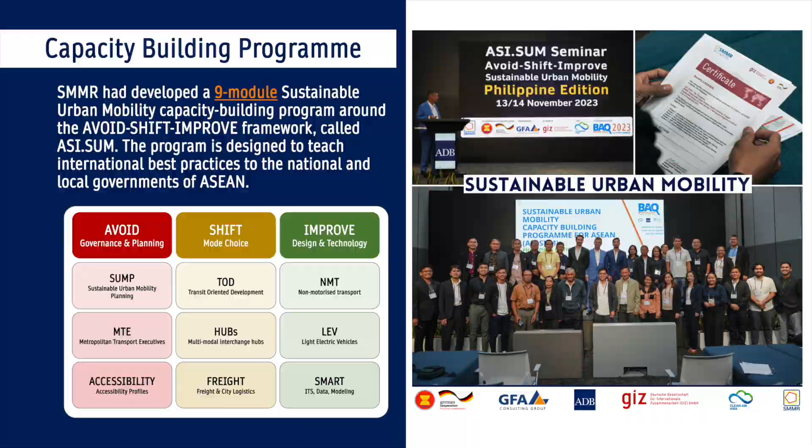And very briefly about me, I've had a very weird and wonderful 10 years of working all over the place, but the last 4 years really concentrated in Southeast Asia. A lot of my non-motorized transport experience comes from the Africa region, which is far less advanced than what I've seen in Southeast Asia. So I've had to start from the very beginnings and build up policy and infrastructure and strategies for different cities and countries. And I have to say here we're at a really good starting point. Not even starting point, you've already got a lot of good infrastructure, but we can really build on that.

This is us at BAQ. I did give an introduction to non-motorized transport. If it's a topic that you're not familiar with, we do have a video online. You're very welcome to watch that, because today I will sort of start where we left off. And for resources and reference material that I use, you may already know the Global Street Design Guide, an excellent resource, highly recommend it. ITDP also has some excellent resources that you can use. And today we go deeper. We talk more on implementation, evaluation, and again, the Global Designing Cities Initiative has really good resources.

So I will very quickly skim through what NMT is. When I say non-motorized transport, maybe we can also encompass micro-electric mobility, and the standard modes we generally include are walking, cycling, small wheel transport, and wheelchair travel. And we promote it for lots of good reasons, but especially because it's an attractive mode for very short distances. And non-motorized transport is really the foundation of a transport system.

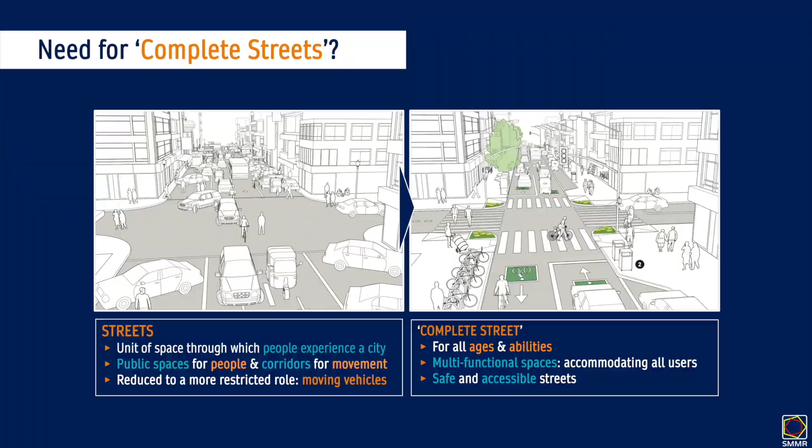However, in many cities in the ASEAN region, in the Philippines, our streets are not designed for all of these functions. And that's why we really want to promote this idea of creating more complete streets that cater to all ages and abilities, and we'll cover the age aspect later today. The objective is really to create safe and accessible spaces, but also very enjoyable spaces where we can spend our time and enjoy. And it sees our streets as multifunctional spaces, something you know very well.

I really like the night market here in Baguio, where you've created zones for the different movements, where you have your vehicular traffic, your commercial pedestrian traffic, who probably walk slightly slower than the pedestrian traffic on the outer lane. And then you've also transformed your space with pop-up shops, and you use the space in very creative, innovative ways. And the sheer volume of people can show that this has a lot of potential and it can be good for business.

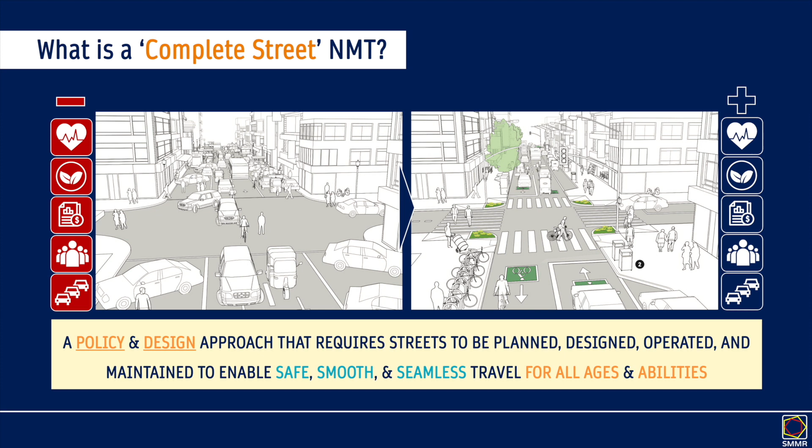And the reason why we want complete streets, you know this, much of our time is spent on streets. And our cities are increasingly our homes. I think the Philippines is roughly 50% urbanized, and that's only going to increase. So we might as well create enjoyable cities that we inhabit. They're essentially our habitats. If we do it in a way where we have complete streets, we have all of these benefits: reduced traffic accidents, better air and noise quality, reduced energy consumption, more equity, more public space, etc.

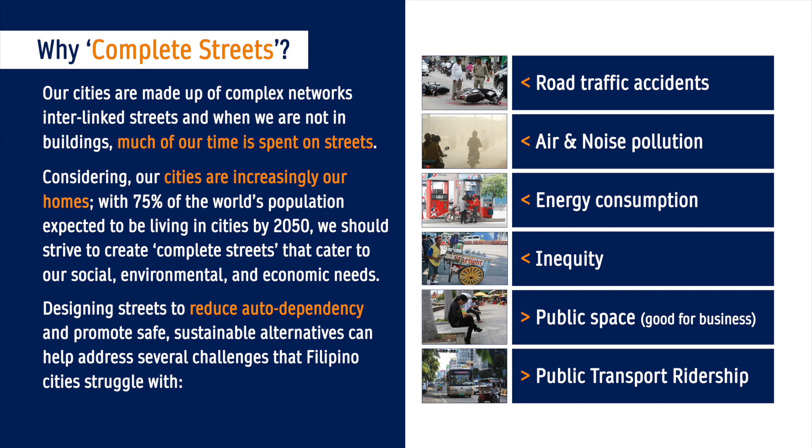And in Manila, we looked at street design elements that we can incorporate to create better streets. And we won't look at these today, but we looked at how we can slow down traffic with traffic calming. We looked at good footpath design, where we acknowledge the different zones and how we can maintain a consistent and continuous right-of-way for pedestrians, but also provide space for the street furniture, cycle lanes, and active frontages, so the space immediately in front of shops.

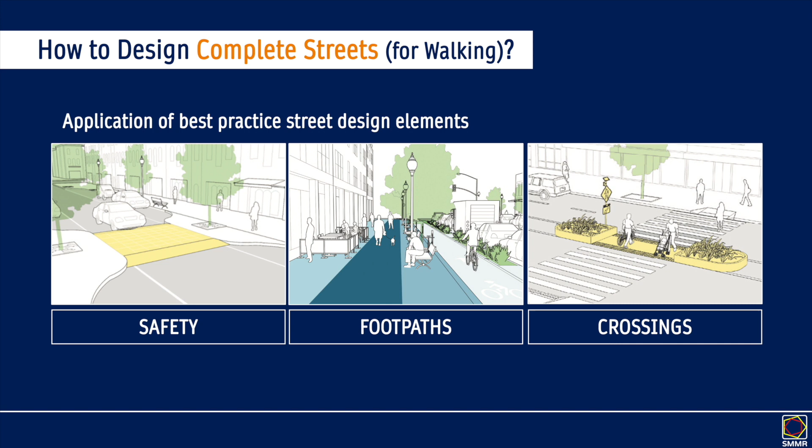And we also looked at crossings, the importance of creating protected crossings where you might have a refuge island, staggered crossings. We also looked at network design, how you can design a finer grained network to make accessibility and connectivity better in a city. And then accessibility and public space are two things we looked at. There's many other topics we could explore, and if there's anything here that's of interest in the future, we can deep dive into a different topic.

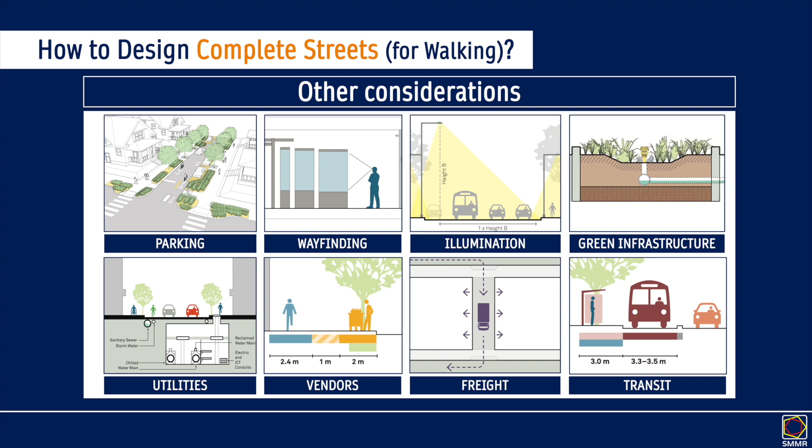The Baguio context. Here I went for a walk. This was on my second day, and I wanted to just capture what I could see. And I'll share a short video, and I did an appraisal. This is purely my user experience. It's not a very scientific method, and it's not very encompassing of the non-CBD areas, which I have since seen.

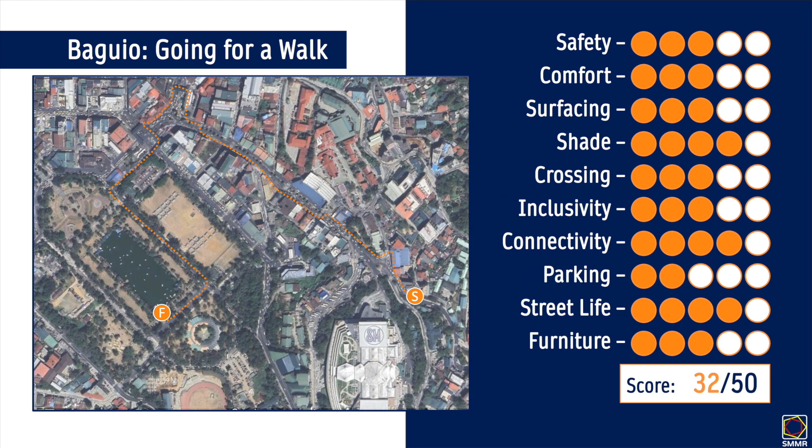And if I was to do an assessment, we did it in Ortigas, next to the Asian Development Bank building, and they got something like 24 points. So a big improvement. There's just a few areas where if they were fixed up, you could have a very nice environment. And I'm obviously trying to be quite critical. I did enjoy my walk, and overall, it was very good.

I also gave some thought to the strengths, the weaknesses, the opportunities and threats here, and the strengths I highlighted in the video. I then later in the week also saw other areas. I saw one of a few raised crossings, which made me very happy.

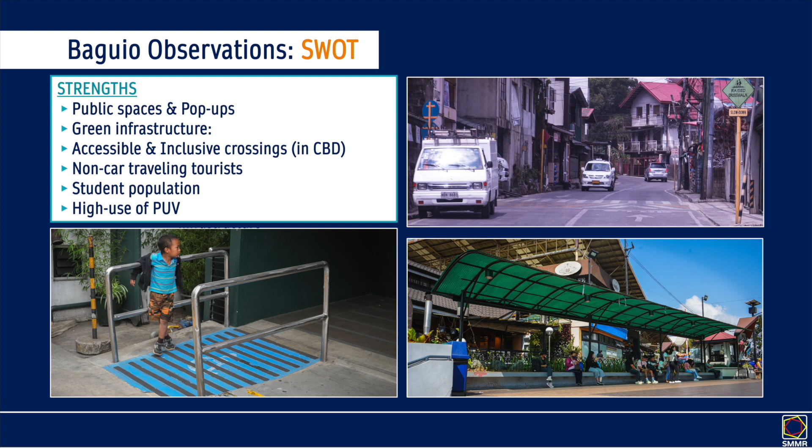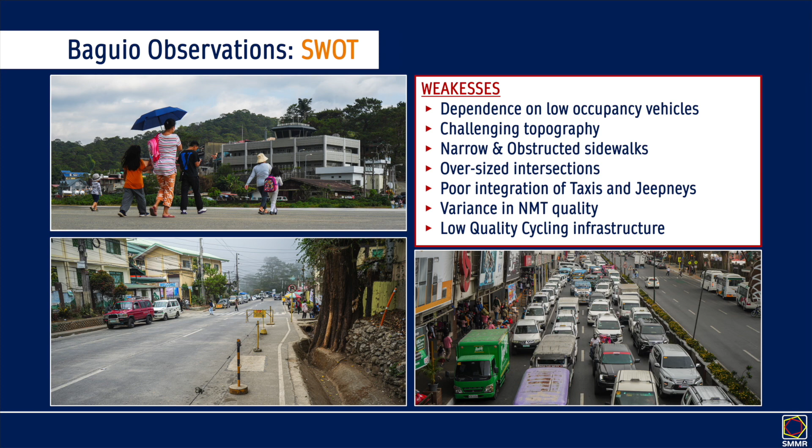And then a lot of opportunities to further calm traffic, to maybe do some traffic management, some traffic signal actuation. As I understand, the traffic lights in the city are not optimized or as optimized as they could be. That could be something to explore if we are to improve flow, especially in the context of closing a street

like Session Road. And other opportunities, again, this idea of cable car, I think that's a fantastic opportunity because you don't have much space. So if you can move people through the air in a vertical way, that could be a great way to, again, shift people out of cars and into an alternative.

And then threats. What I keep realizing is Baguio is a victim of its own success. You're doing great work, but the pace of growth and the pace at which more people are coming to the city is faster than you can absorb by building new infrastructure. And I suppose that's a great problem to have.

But if you didn't have this surge where you went from what was once 25,000 to almost 400,000, the infrastructure you have would be plentiful. And again, your problem is dealing with this in a context of growth. And so what we need to explore is a multi-dimensional strategy.

On behalf of the SMMR Project, we really promote the Sustainable Urban Mobility Planning methodology or approach, SUMP. You have your Growth Node Development Plan, which embraces a lot of these ideas. And you know this better than I do, but we need to avoid promoting more car-based mobility, shift towards more space-efficient mobility, which will include walking, ideally also some cycling, and mass transit.

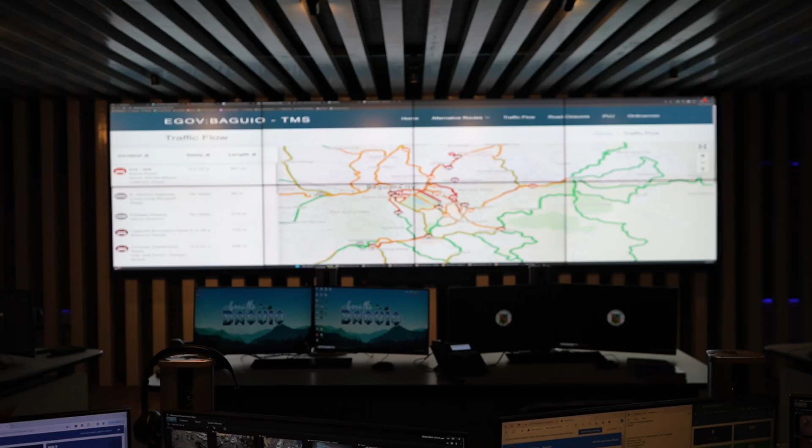And we need to improve the non-motorized transport environment. Also, we can make improvements to traffic management. And I visited the SC3, the Smart City Command and Control Center. Very impressive. You have very advanced monitoring capabilities. And I think in the future, you could also build in some control capabilities where you don't just monitor, but when you observe something, you adapt.

Say you provide information to vehicle drivers through variable message signs, or you update your traffic signals in such a way that improves flow. So a lot of great things are happening, but a lot more could be done. And today we're really here to talk about streets and how we can transform streets.

Street transformations. You may have done some of this in the past, but what we do with the SMMR Project is we use a tactical urbanism-based approach. So I'd like to cover some definitions, look at some types of tactical urbanism projects with some case studies and how we can phase them.

If this is a new concept, tactical urbanism is where you temporarily transform a space in hope to eventually make it permanent, because permanent change is often complicated, politicized, controversial. So when you change your streets, people don't like change, so you should do it gently and incrementally, and tactical urbanism allows us to do this. And often you would use things like cones and chalk just to test new ideas.

You would use, at a later stage, maybe some paint and some street furniture to improve the space. Also, you could set up plants and pots to serve as barriers to guide traffic. And you can also get creative and create new public spaces in these areas with street art installations. And the idea is to involve local communities as best as possible.

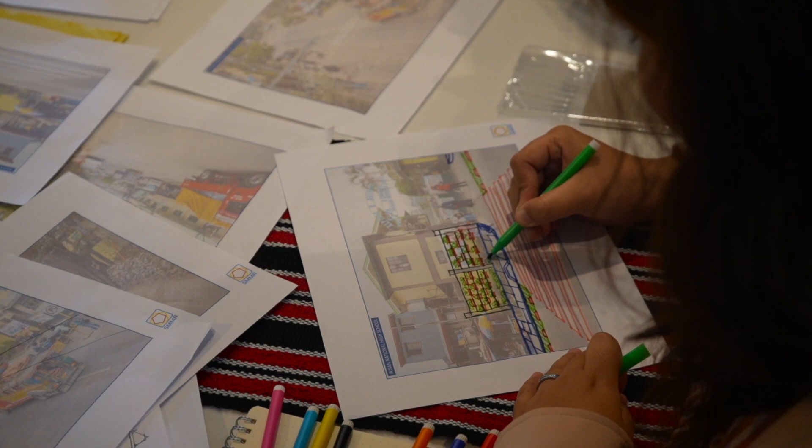We bring in as many stakeholders, and this is what we're doing here. And we hope to involve you in the future. And we want to get everyone's thoughts and feedback and have their DNA reflected in the project. Because if we create something that's desirable for the greatest number of people, there's a higher chance it will be successful. And here's an example. This is the street before, this is it afterwards.

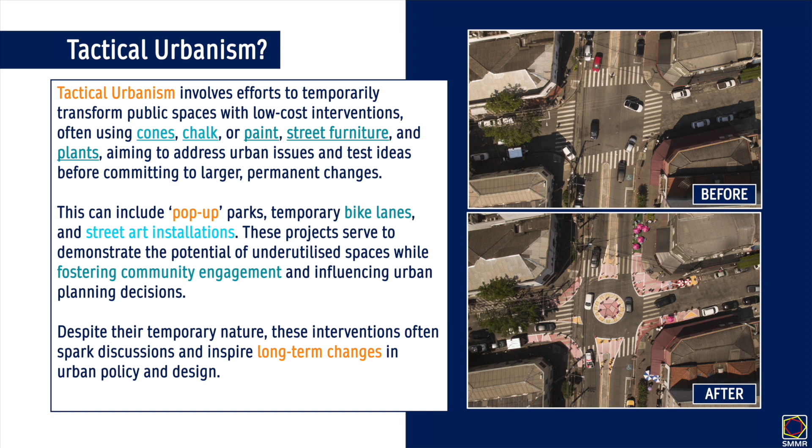And we can look at a few more examples and just generally how we can go about introducing these concepts and phasing them. You would start with a pop-up, and this is from a piece of work I was doing in Ethiopia. So the pop-up is something you do just for a couple hours, maybe a couple days, very low cost. Here we did it just using paint and cones.

And if the local community doesn't like it, if we receive a lot of resistance, the rain will wash it away and we just remove the cones. No problem. If all goes well, and sometimes you need to iterate a little bit, move the cones, move the strings, move whatever you have set up to find a configuration that works for you.

Then you can move to an interim stage, which is a project that would probably last several weeks or months, sometimes even years. You could say that Session Road, the pedestrianization efforts, is sort of an interim step, hopefully, if one day it does become fully pedestrianized, and that generally involves slightly higher costs.

You will use more sophisticated materials. And if that goes well and you're able to source the financing you need and get all the approvals and all the public consensus, you can move to creating a more capital-intensive project, which would be a civil works-based project.

And you can sort of see the workflow we went through in Ethiopia. And now many city streets have been inspired by what was once just a pop-up. A bit of paint, some cones, has now resulted in many urban streets being upgraded to a much higher standard. And it's just a really great way for us to trial ideas and demonstrate to the public what their space could be like.

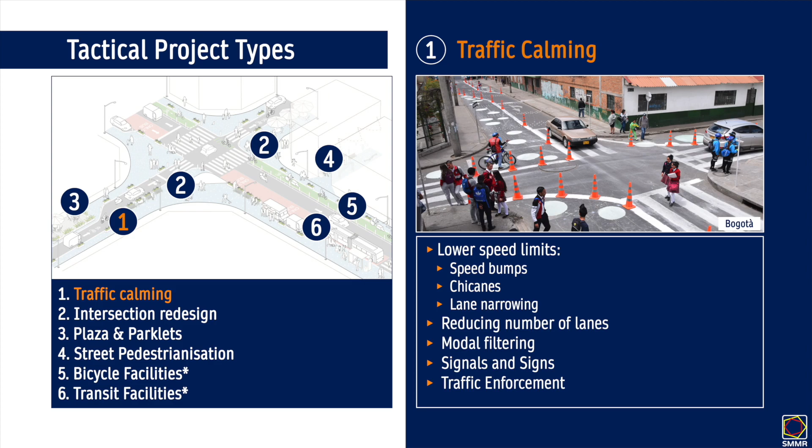And there's a lot of different types of tactical projects we can explore. A good start is with traffic calming, especially around, say, school zones, which is what we're currently exploring, where you could calm traffic using speed bumps, chicanes, so lane shifts, forcing vehicles to not be able to drive in a straight line by narrowing your lanes. Narrow lanes means slower traffic.

You could do some modal filtering, so prevent certain types of vehicles from entering the space. Maybe heavy goods vehicles shouldn't be in some of these streets, so you could remove them, or you could do something as simple as some traffic enforcement, essentially to slow vehicles down to increase safety.

This example I shared earlier is in Sao Paulo in Brazil, and here they introduced a roundabout. You can also see they made the cornering radii more tight, so a vehicle can't corner as fast, it has to slow down. That will increase safety.

Also, the vehicles weren't turning in the intersection in a very safe way. They were occupying more space than they needed. And so a roundabout can be good for guiding people in a more guided way, so you can anticipate the vehicle movement better, which is nice for pedestrians.

You also see the median has also been turned into a refuge island, and the curb has also been extended in some areas. And if you extend your curb, you reduce the crossing distance, and it creates a much more pleasant space for pedestrians. This began as a pop-up, and in one year, the treatments that they experimented with were made permanent.

And there's a lot of data collection that goes into this. You have to survey people before and after. This is both citizen surveys or citizen dialogues where you ask local residents, shop owners, drivers, their thoughts. And of course, you can also do more technical surveys where you do traffic counts of vehicles, of pedestrians.

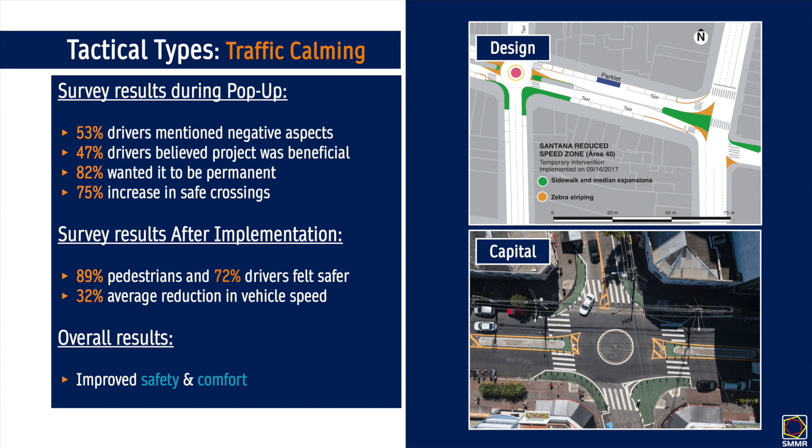More consultations were done just to explore how the space could be improved. And after the full implementation, the data they got during the surveys was more positive. It took people a bit of time to get used to the change. And again, this is why this is a great approach, because it gently introduces these ideas and helps you manage the politicization of some of these activities.

This is another traffic calming project. We saw the image earlier in Colombia, where you can see there's wider sidewalks. They've reduced the corner radius or radii. They've reduced the crossing distance. Vehicles here, if you see number 5, can no longer drive in a straight line, so they're forced to slow down on the approach to the intersection. And all of this is very simple, very low cost, but has quite an impact on the local area.

And here also data was collected. 93% felt safer. There was a 26% decrease in average vehicle speeds. 27% of people were using the curb extensions, and there was a 22% increase in people using the crossings.

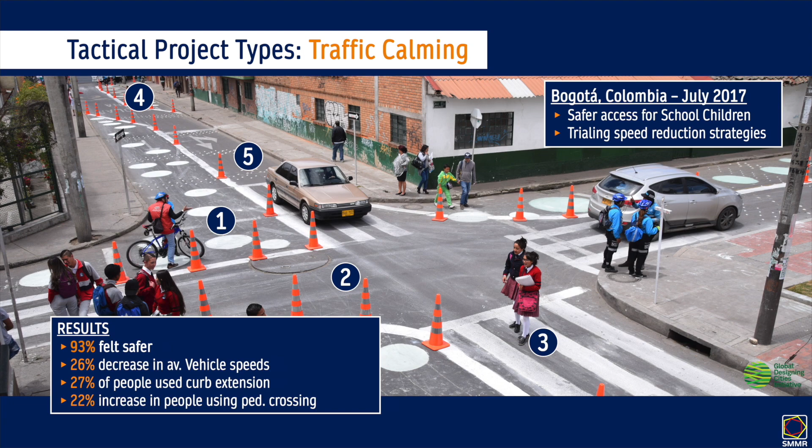So, small measures with, I think, some valuable changes. Then we can look at intersection redesign.

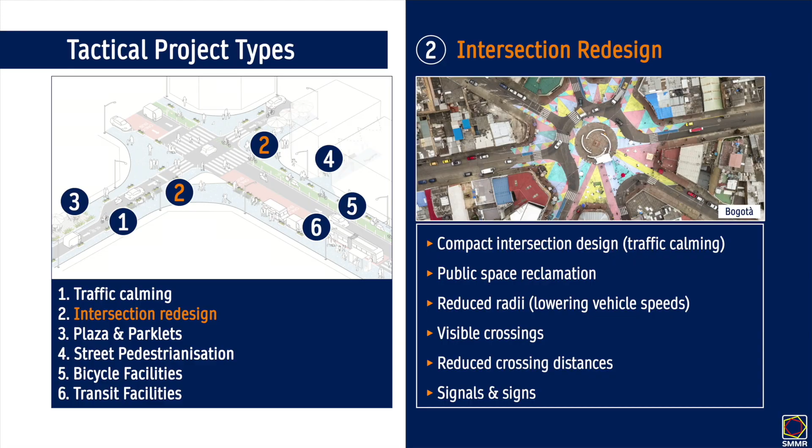I know the past two examples were also intersections, but the idea there was really to calm traffic. You can do much bigger projects around intersections. I've seen some very oversized intersections in Baguio, and from observation feel like some of that space could probably be reclaimed in a way where pedestrians will really benefit, but vehicles will probably also benefit. These look like quite stressful spaces to drive into, where there's a lot of potential for conflict. If we could rationalize that through design, it could be a win-win for everybody.

This is a project I'm working on in Cambodia, inspired by Colombia. Whenever doing these projects, I recommend searching online for other cities doing similar styles of implementations—there's a lot you can learn from them. That's essentially what we've been doing in Cambodia.

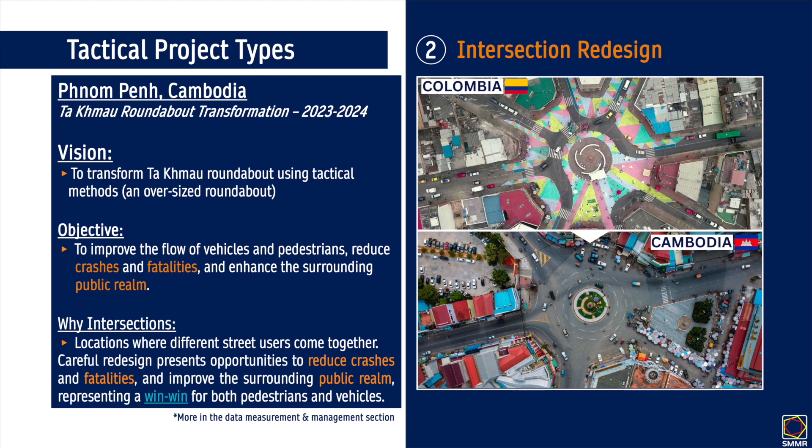We wanted to transform this roundabout, and I'll go into more depth later on this case study. But essentially you have a big monument in the middle here—it's a Buddhist monument in a Buddhist country. Every day in the evening, people start crossing this very dangerous roundabout to go pray, and it's kind of a shame that they have to go through that to then do their prayers.

You can also see there's a lot of tricycles just clustering into the street. The parking here is just haphazard, and it's a very unoptimized way of using the space. There's a lack of pedestrian crossings, and there's just a lot of room for improvement. So we are currently exploring how we can improve this space. It hasn't been implemented yet, but we're now at a later consultation phase and gearing up for our implementation. I'll cover some of the data elements that we collected to try to make this a reality.

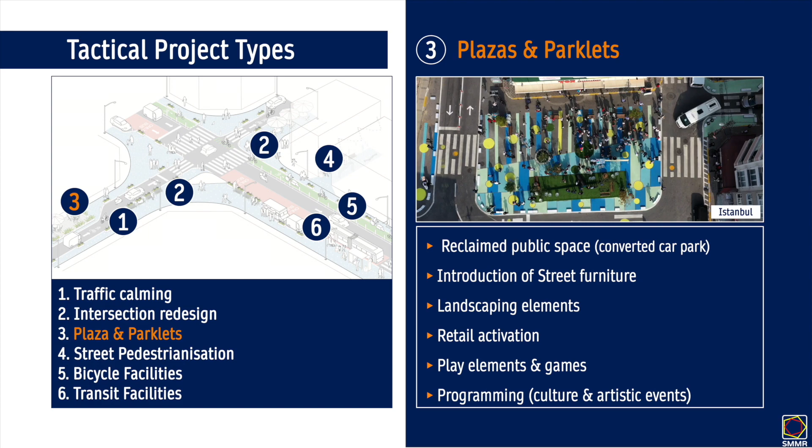Other ideas are plazas and parklets, where you find an underutilized space. This is a car park in Istanbul where you can introduce features, street furniture, landscaping elements, just to reactivate the space. If you create a more pleasant space, the surrounding businesses are probably going to benefit. If you have a coffee shop here, he will definitely see more customers, and you sort of revitalize areas in the city. Another exercise we could do is maybe pinpoint potential locations for projects like that.

These types of projects do work. My city, Dublin, pedestrianized the main street in the city centre. It became the main street because it was pedestrianized, and it now has the highest land values in all of the city. Similar story in Copenhagen.

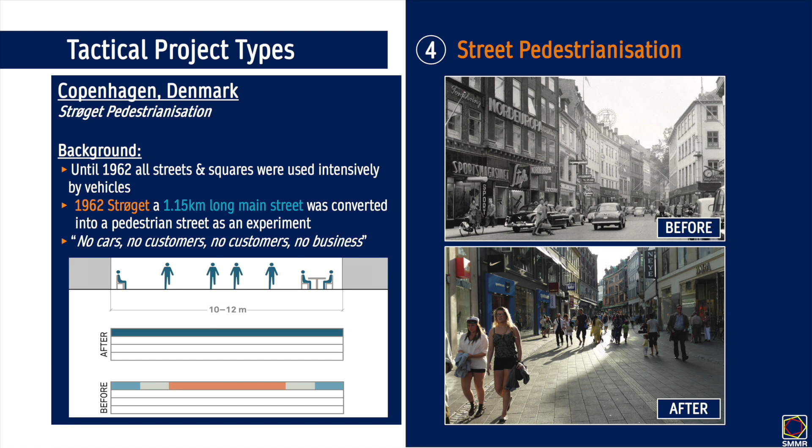Back in 1962, this was a very car-dominated street, and they pedestrianized it. It was not popular at first—people thought no cars means no customers, which means no business. But I can find you dozens of case studies where the exact opposite has happened.

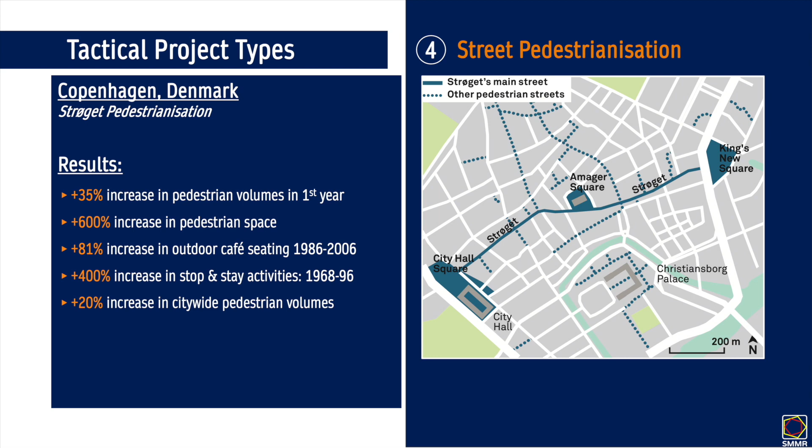And in the Filipino context, you have formalized tax-based systems, so if there's more customers, there's more tax revenue—there's really a strong incentive to do projects like this. Here, quite similar, 1.15 kilometers of commercial streetway were pedestrianized, and over time they added new areas. I think Session Road could also be similar. There are some areas off of Session Road that could be turned into public spaces, and then every day will feel like Sunday, which as I saw was really fun.

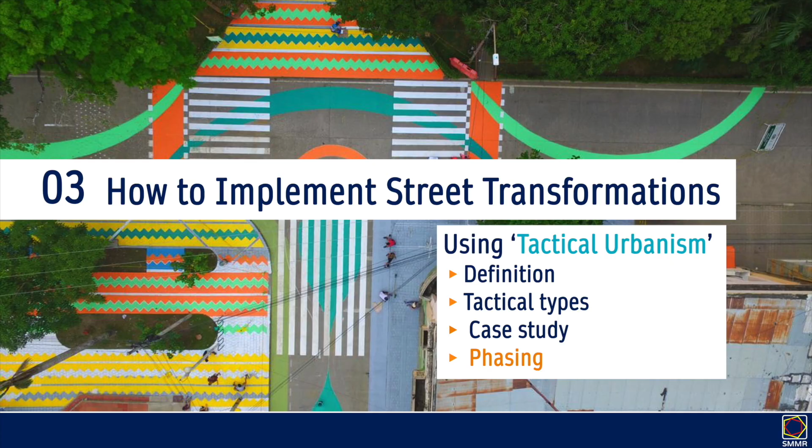Then when you do a street transformation, if we zoom out a bit and talk about the phasing of the different project types—you've already done a lot of work, but if I was going to a city who hadn't done anything, I would recommend starting with the least disruptive types of projects. They're the easiest to get over the line, and you should always be trying to maximize public approval, at least in the early stages.

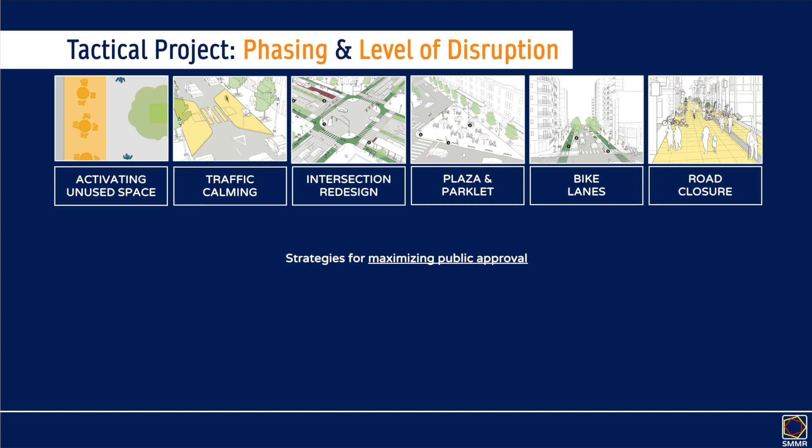So say activating an unused space that has a low impact on traffic, so the level of disruption is quite low. Traffic calming, again, you might slow traffic, that's the intention, so drivers won't be happy, but overall I think they can see the benefits, and there are ways you can also benefit the drivers.

And then as you move across the spectrum, a road closure has a very high impact on traffic, so it's very disruptive. So if you want to do this, your citizens, your local population needs to really understand the benefits, and not just understand, but have experienced the benefits of public space. And that's why it's generally good to move through the different project types before you do something very ambitious.

But some cities have gone straight to road closures and the results have been good. But obviously, start small and work your way up. And that's what we have in mind for our project.

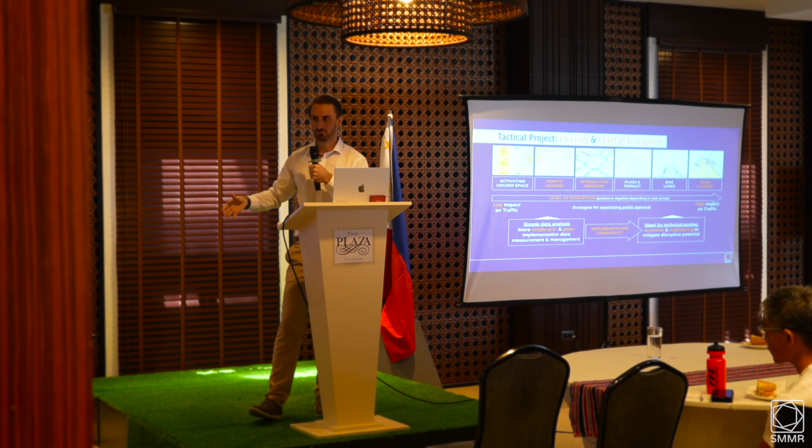It's also, from the project development perspective, a lot easier if you start small. The data you need is more simple and basic. So you may not even need to do traffic counts. If you just have a small project where you lay out cones, you can just use your observations and intuition, see what works, what doesn't work, probably spend time observing what happens during the peak hours.

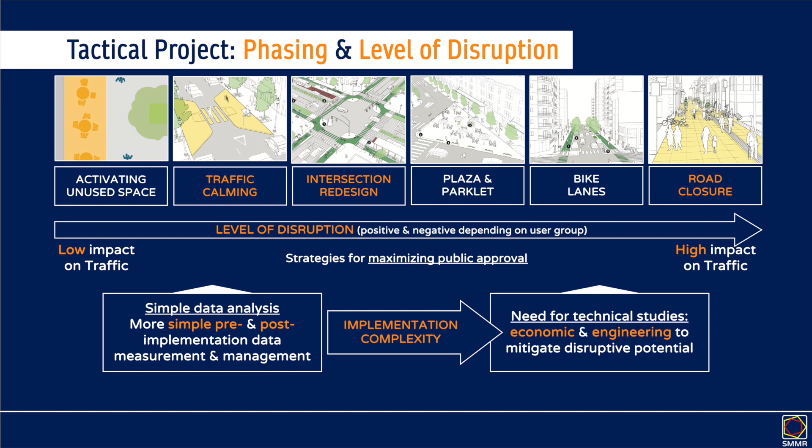And that can be done in a very short time span. As you go to more complex projects, you need to collect more data, traffic counts for vehicles, pedestrians, get a lot more opinions, and as you go to a full road closure, that gets a lot more complicated.

In the case of Session Road, you probably need to do a comprehensive economic study, a cost-benefit analysis, or even more, a multi-criteria analysis to really understand the impact, and a probably quite complex traffic impact assessment where you use sophisticated engineering tools. You don't need to.

You could just do it and the impact would be felt by the vehicle drivers. But if you could anticipate the impact and produce a lot of good communication collateral to communicate to the public - this is the impact this will have, this is how we intend to mitigate it, here is the proof, here is our data, here is our simulation - then you can make these projects a reality.

But of course, that requires a lot more technical studies, which requires more resources, be it cost or human resources. And so our recommendation is really start small and work your way up.

Try to also focus on the most vulnerable groups. So we are thinking a lot about children. They are one of the vulnerable groups, especially young children that are, say, less than a meter tall, and elderly, and also disability groups. Because if you start with them, the likelihood of opposition is lesser.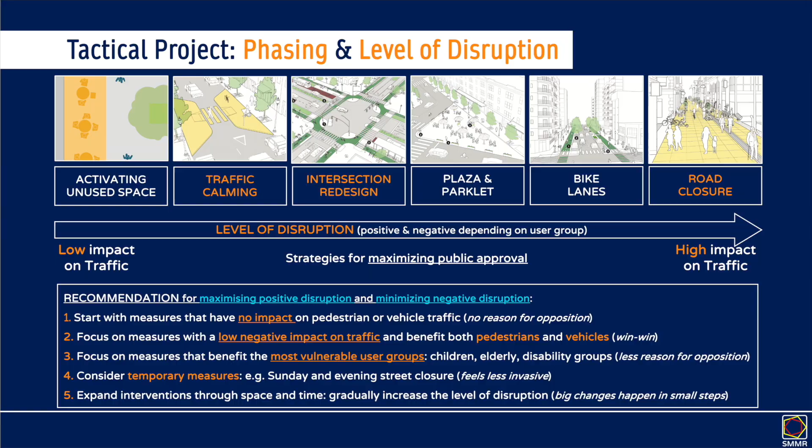And so we're applying this to the idea we have for a project in the school zone. And also start small or start temporary. Session Road is a big impact or high impact activity, but it's done in a temporal way where it's only on Sundays. So that's also a way you can test big ideas and manage the backlash by saying, okay, it's just Sunday, we're just trying it.

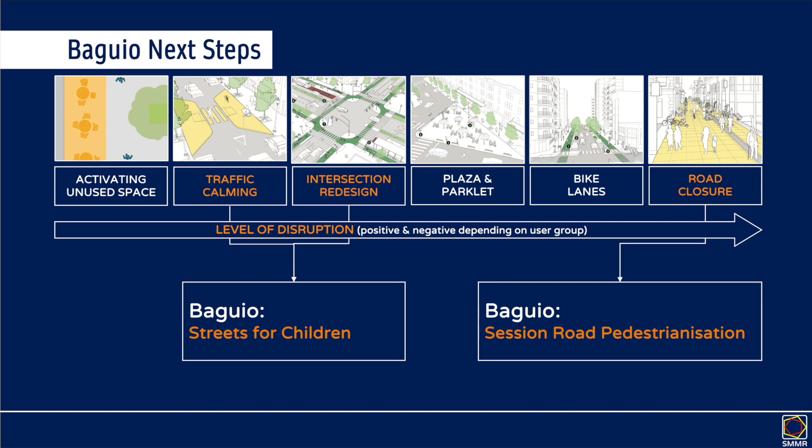This brings us closer to the idea for school zones. So we really want to start with streets for children, a vulnerable group, and the idea we have is really centered around, in part, activating some unused space that we observed, calming the traffic, and there's no intersection at the school we're looking at, but I'm sure some of the schools in Baguio are around intersections and there could be room to tactically improve them.

So going a bit deeper on the topic of children, obviously our streets have a big impact on our development, and we'll look at that more in the afternoon. But the streets you have and use to get to school will influence your health, your physical and cognitive development, and your social well-being. And these types of projects are also really good for bringing people together.

Yesterday, essentially with a few emails and then a meeting on Wednesday with the school, Irisan National High School, we discussed a few ideas very quickly. We spun that off into a whole training workshop yesterday where we had students, teachers, parents, grandparents, and all of that happened so fast because people were just broadly interested in, these are my kids, my grandchildren.

I do have an interest in seeing their experience getting to school improved, and in a matter of 48 hours we gathered very valuable insights on what we can do. What we are proposing also builds on the activities already being explored as part of this Streets for Children program. Now I was hoping to deep dive into the tactical urbanism workflow, go into how we can make it happen. There are multiple steps.

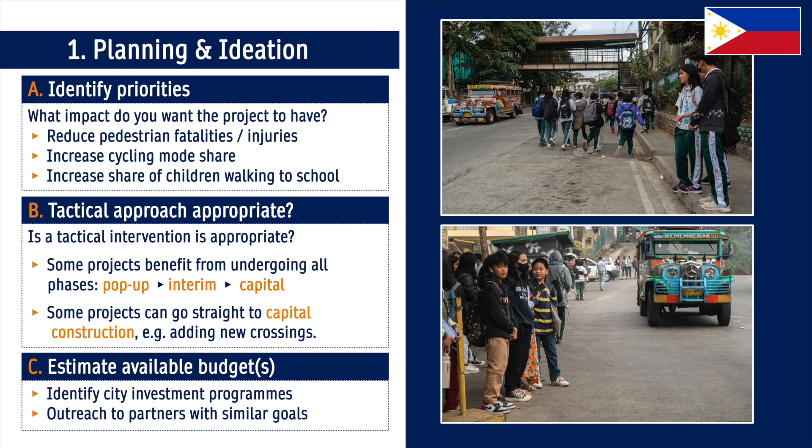Early on it is good to estimate or see what kind of budget you have available, because you will be sharing with stakeholders who will be affected, and they will be curious to know to what extent can you change and upgrade this space. Some of these questions you don't always have the ability to answer early on; sometimes you need to gain a bit of momentum before they come to light. So that's really what you would do in the planning and ideation phase.

In the Cambodian project I'm working on, our priority was road safety. This is an accident hotspot. We also wanted to improve pedestrian movement throughout this space, and here tactical urbanism was a good approach.

In Cambodia, there's still very little understanding and regard for non-motorized transport. So even raising the idea of street pedestrianization is so unthinkable that we decided, let's frame our project around improving traffic flow. Through the improvement of traffic flow, we can also benefit the pedestrians. When we framed it like that, we could get more consensus around this idea.

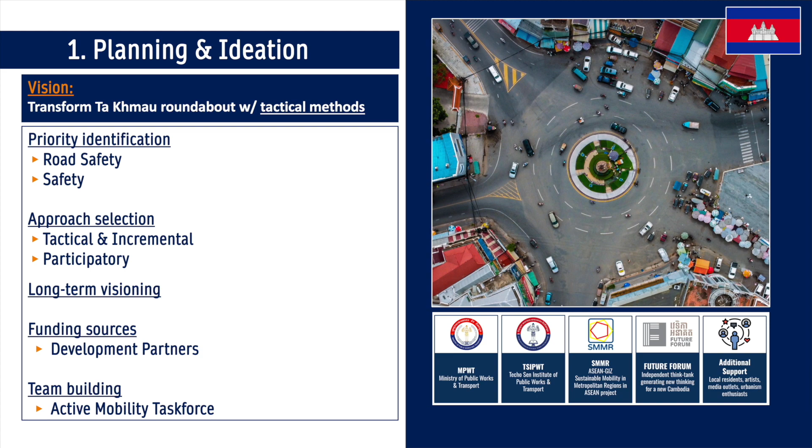We also have a long-term vision where we've identified lots of different intersections where what we do here could then be scaled and replicated. To do this, we also put together a team: the Active Mobility Task Force, which includes the Ministry of Public Works and Transport, the University, the SMMR Project, a local think tank, and we've also received a lot of support from local communities and residents of the area.

We also did some desktop research and saw this project in Colombia and thought, okay, this seems like a good kind of project to emulate or at least learn from.

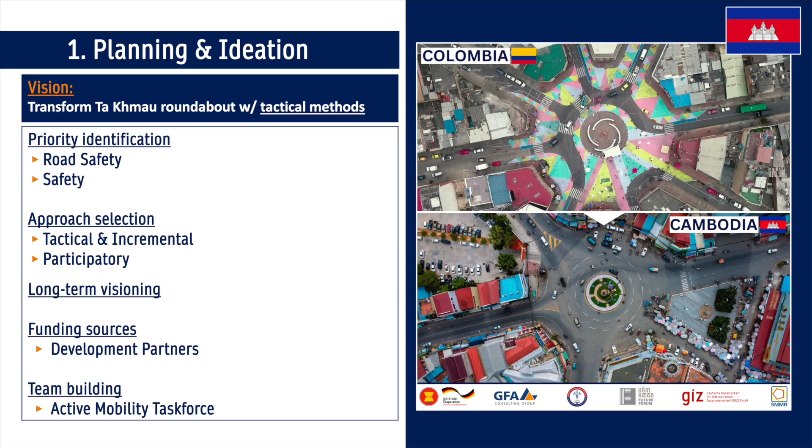In this phase you also select your location. We looked at lots of different options and chose to focus on an intersection because these are areas where you can have quite a big impact. They're very conflict-prone areas. In the case of Phnom Penh, the city where I live, a lot of the intersections are way oversized - there's so much space that could be reclaimed.

If you ask anyone here, say this is Ta Khmau, ask them about Ta Khmau, whether they know anything about non-motorized transport or not, they will shake their head and say, oh that's a terrible place. It's always terrifying when I show up on my motorbike and have to cross this space, and everything is overlapping in a way I've never even seen in the Philippines. We have a very high share of motorcycles and it's very stressful.

So when we ask them about certain spaces, the people already know, and you can sense that this is something they would like to see happen. After we selected our location, we chose this one - it's called Ta Khmau.

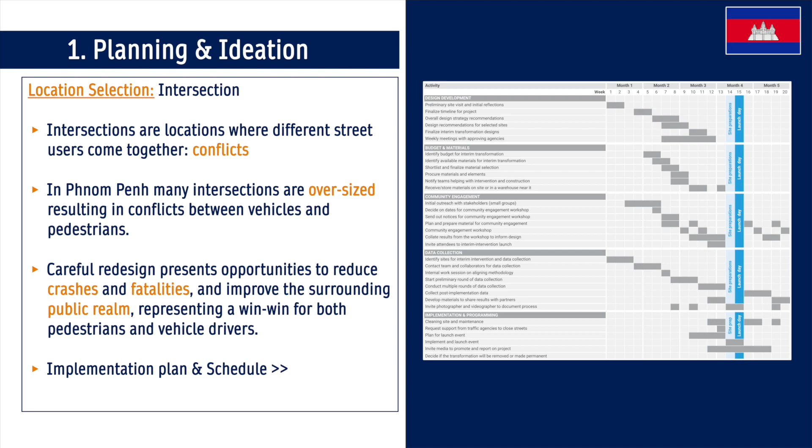We then prepared a detailed plan, and once we had that, we could really begin. This step involves appraising the existing condition, and we began doing that over the last two days around Irisan. We did some site visits and gathered a lot of visual documentation.

We have lots of photographs, lots of videos, and we're starting to understand how this space works. It's a really interesting space where you have back-to-back-to-back jeepneys, especially at 3 p.m. when the elementary school closes, which is here. And then at 4 p.m. it continues when the high school closes. You have a lot of crossing right between the two school gates.

You have some tactical urbanism already, you could say, to protect especially the elementary school kids walking up and down here, but you also have an open drain here, which is an opportunity area. If you could cover that, you could reclaim a lot of space.

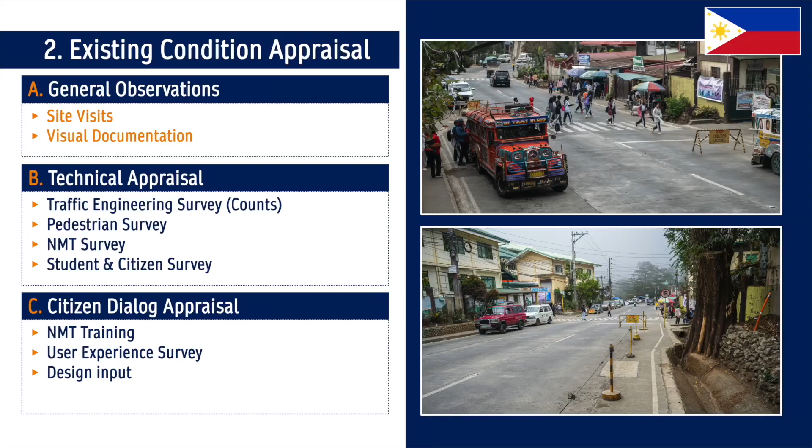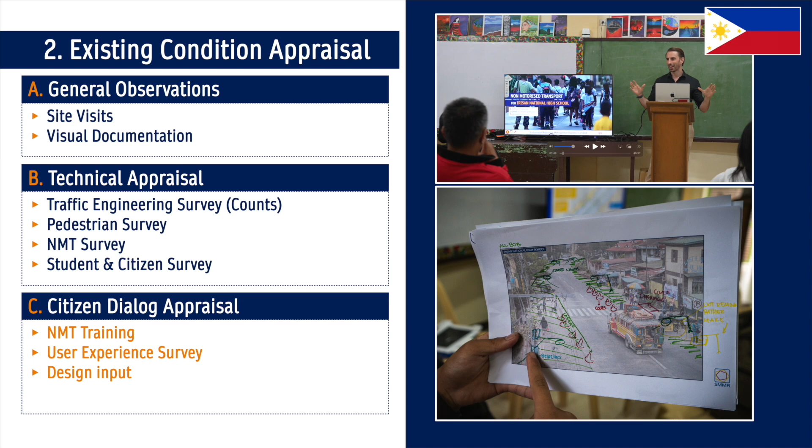So then you can also do some trainings. Yesterday we gave a talk to the 12th grade students introducing the topic of urbanism. We had to take a step back and acknowledge that maybe they've never even thought about how space can be transformed, and that our streets are the outcome of conscious decision making, and that they can have a say or some agency in how our streets are shaped.

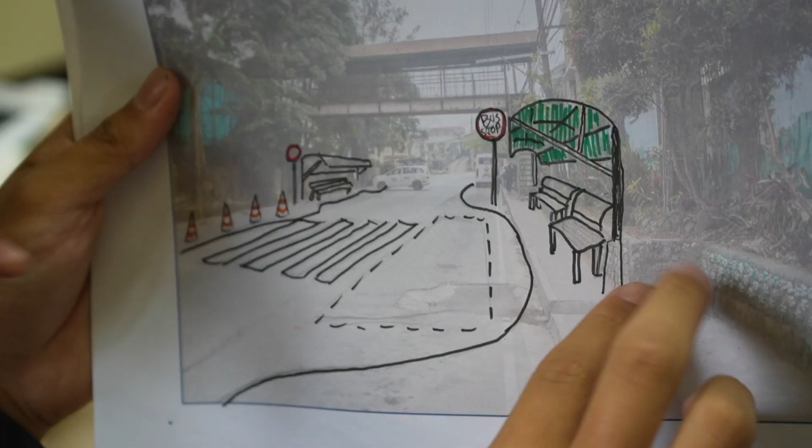And we gave them a survey. We wanted to understand their subjective user experience going to and from school. We asked them lots of different questions on safety, on whether or not they feel there's enough, say, street furniture around the school. A big list of questions, I think 20 questions in total. And then we also asked them to sketch ideas over photographs. We got lots of very beautiful insights, lots of great ideas, some very implementable and easy to introduce ideas.

What we would now need to do as one of the next steps is a technical appraisal. So start doing surveys. There's many different types of surveys we could and should do. And what we've done in Cambodia, again, also did site visits, wanted to understand how the space works. And from that, we developed a survey. And it's not one survey, it's multiple surveys. We want to collect quantitative data, also qualitative data.

So for the traffic engineering survey, we had to do traffic counts. We wanted to understand over a 12-hour period the traffic volumes. We didn't even know when the peak hour was, so we had to really collect in 15-minute intervals counts throughout the day, and also categorize the vehicle types to understand just the general mode share.

We also did a pedestrian survey where we did pedestrian counts, which is similar to traffic counts, but slightly different methodology. We then did an NMT survey, and I'll share some of the results, where we essentially studied the environment, measured the footpaths, counted the obstructions, counted the street furniture, and you'll see the maps we produced with that data.

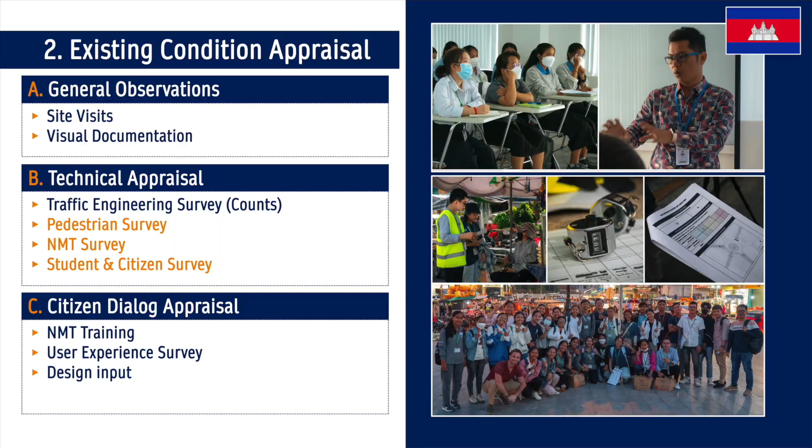We know that there is a camera that does have analytic capabilities on the overpass at the school, so we could get this data quite easily, which is a very good starting point.

And the surveys looked a bit like this. So traffic survey, that's the counts. Pedestrian survey also counts. The NMT survey, I'll show you the results. And the citizen survey, obviously you need to understand what the locals of this area think of the proposition of improving the space. So we surveyed 52 commuters, people driving through the space, we stopped them, we asked them questions. We also interviewed shop owners and street vendors just to gauge what they thought.

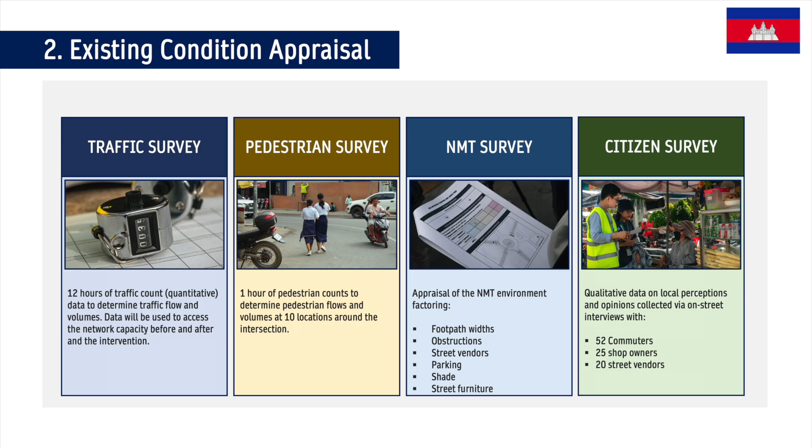For the NMT survey, we looked at variables like this. We went around and we measured the existing footpaths against best practice. So if your footpath is more than 260 centimeters, I don't know it in feet, but that's generally a very wide footpath. And this is the results we got.

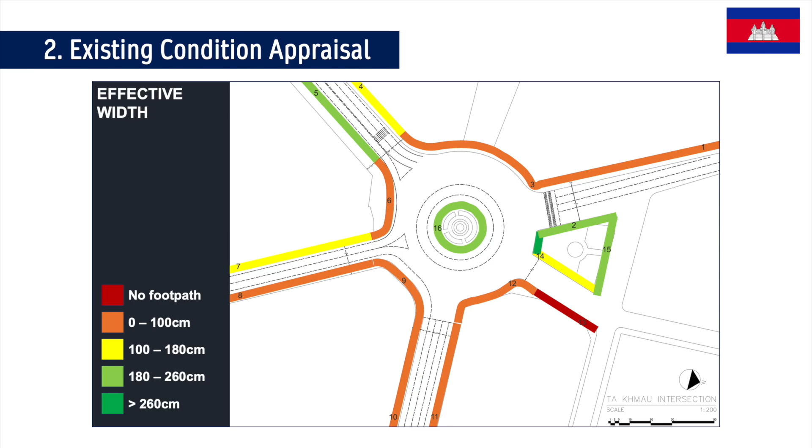And if you compare the width versus the width you can actually use, it's not a very good picture here. Suddenly you have your wide footpaths, but you can't actually use them. And most of them are too narrow to even move across with a wheelchair. So it's useful to know that. And when you know that, you need to understand why the effective width is reduced so much. And generally it's because of obstructions.

There's lots of different types of obstructions. There could be street vendors. There could be construction rubble. There could be parked vehicles. And there could be more like utility boxes that aren't well integrated into the streetscape.

So we went around and we counted each of the obstructions, but we categorized them on whether or not they were permanent or temporary. So if you have lots of temporary obstructions, like a street vendor, they are easy to rearrange in the space. If you have permanent obstructions, like an electricity utility box, that's much more complicated.

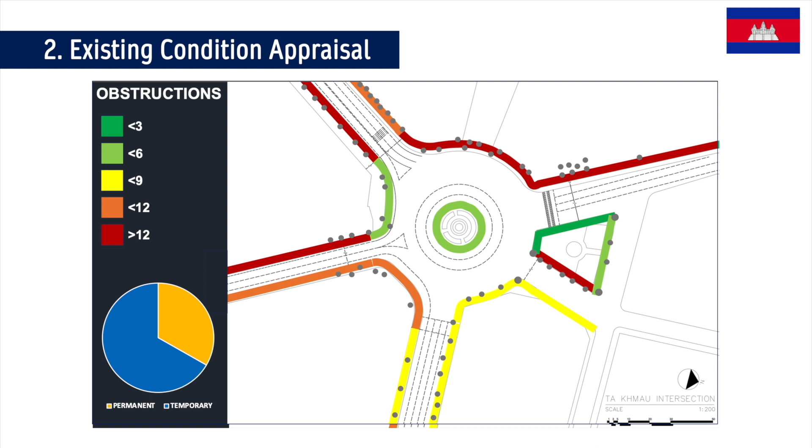But generally, you'll find, at least in the Southeast Asian context, that most of the obstructions are temporary, and through a bit of design enforcement and later down the line policy, you can manage these, and suddenly you can free up a lot of your space, win back some of your effective width. We also looked at the surfacing, so how smooth the footpath was, and if there was a footpath.

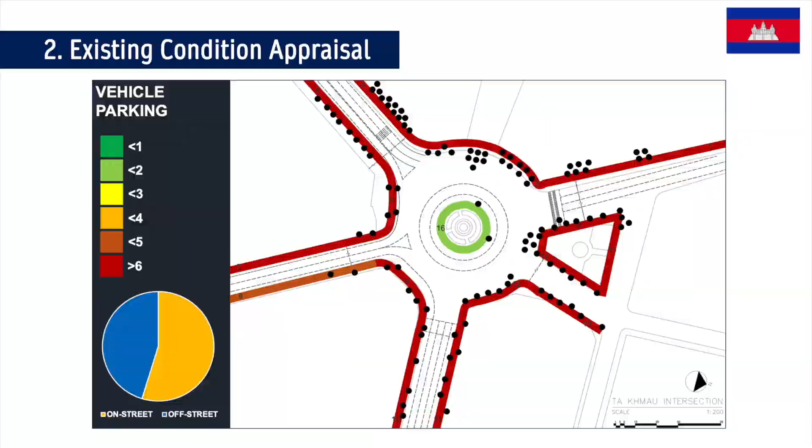We also looked at where vehicles are parked, and there's no parking strategy in this space, but there's a lot of parked vehicles. So parking needs to be understood. So we have to count how many vehicles are parking, where they're parking, understand why they're parking there, and see if there's a way we can reorganize the space. And fortunately, Cambodia, again, is very two-wheeler based. So they're relatively space efficient, and parking strategies can be easier to introduce.

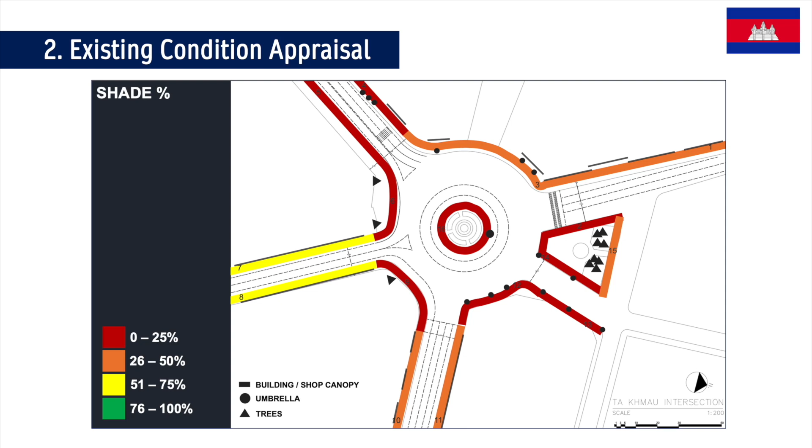We also looked at shade, and here we should look at shade and shelter, given that it rains. And again, if you want to encourage walking, you need to create the most comfortable environment possible. And if you can provide shade with shelters or green infrastructure, it's worthwhile surveying that. And yesterday, if we look at the sketches of the 12th graders, we can see a lot of them were drawing sheltered areas so they could be out of the sun and out of the rain.

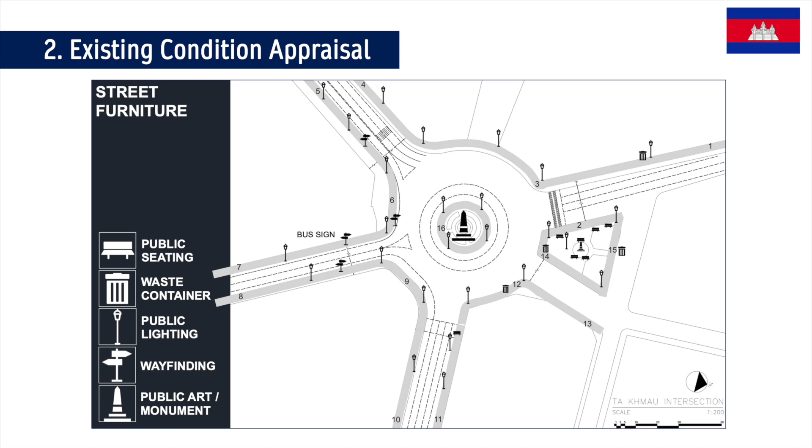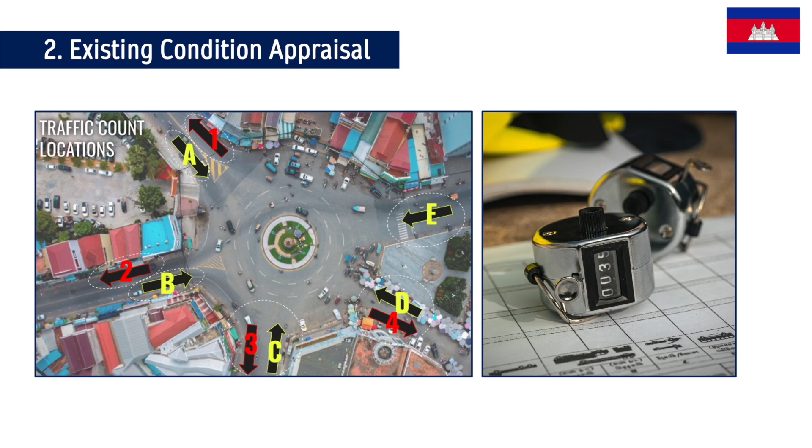You can also look and map out all the different street furniture, and we saw a lot. Same could be done for the traffic counts, where I have a great architecture team working on this project. We don't have a great GIS team, so those maps were made in PowerPoint. But it works. It's enough to essentially communicate what we're trying to do. But it's not the most scientific way, I must admit. If I have the time, I will eventually get around to it myself.

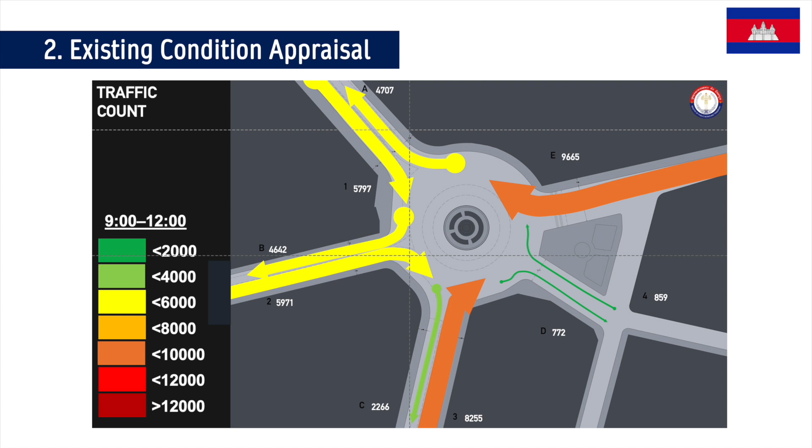But we made even our traffic count maps in PowerPoint, and you can sort of see the volumes. And we did this for a 12-hour period, mapped it all out. And ideally, we do this in a GIS tool, and we can see in 15-minute, or we can aggregate in hour intervals and understand the flow of vehicles. So then we can understand, if we remove this space, what will be the level of service of the road. And for that, I don't have the outputs to show yet, but we are developing a micro simulation from the data we collected.

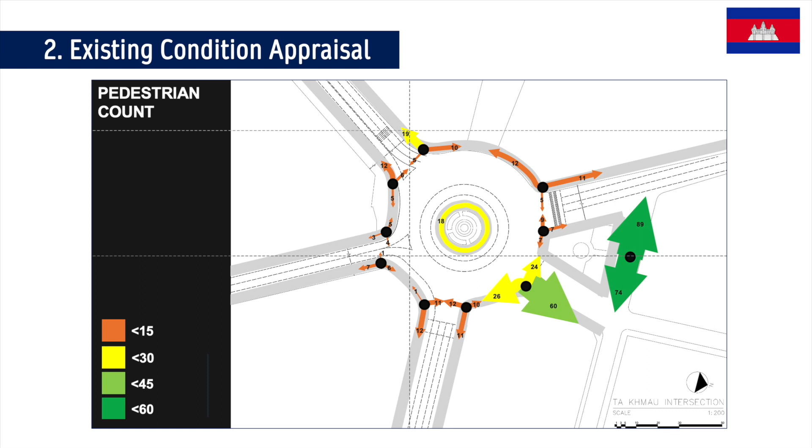Similarly, for the pedestrian counts, we tried to understand the movements, and there were surprisingly few pedestrians, which is no surprise. It's such an unpleasant space to navigate. It doesn't work in our favor if we present it as a space where there aren't pedestrians, but we won't highlight that as one of the main findings, but I'm confident that once we implement our measures, these numbers will significantly increase.

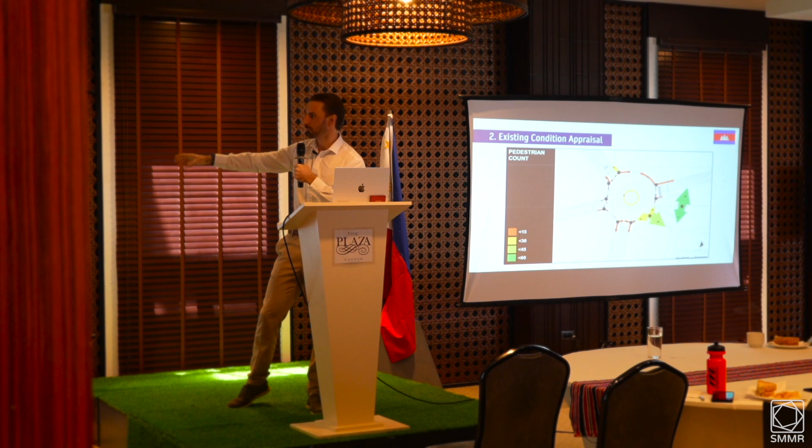We also got lots of information from the shop owners, asked them what they wanted: sidewalks, traffic signs, street lighting, greenery, benches, etc. We also surveyed them and asked them to what extent they would support some of the measures that we were presenting to them, and got their feedback.

Similarly, with street vendors, they did not want to share much information, but they did want to see improved traffic flow. But they were, again, very suspicious because they are not legally allowed to operate where they are, and there was a bit of a trust issue there. Even though we were saying, look, we want to find ways to better integrate you. But of course, if you integrate them, you start to semi-formalize them, and it's only a matter of time before someone from a different government department will come and say, hey, it's time for you to start paying your taxes.

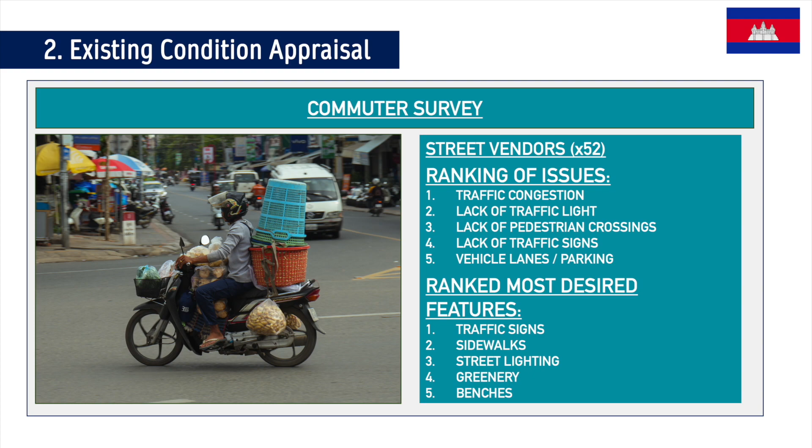We also asked commuters what they thought, and they also gave us lots of good ideas on what they would like. And they also didn't find that the space was particularly safe, and they found it quite stressful to navigate through this space. And then once we gathered all this data, we had a lot of very good inputs to put together a design.

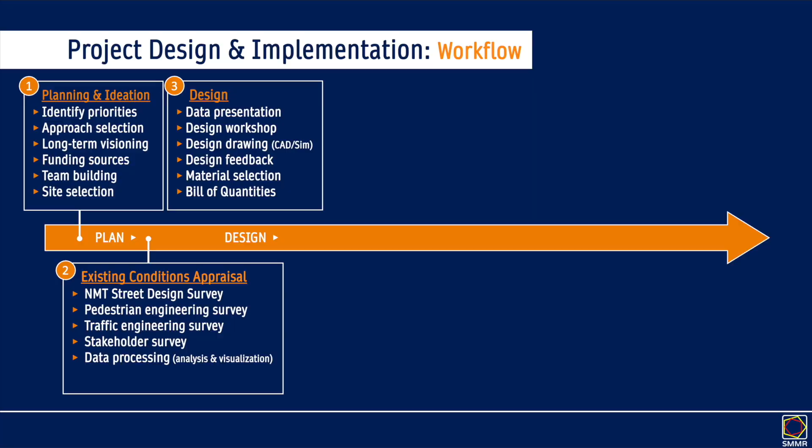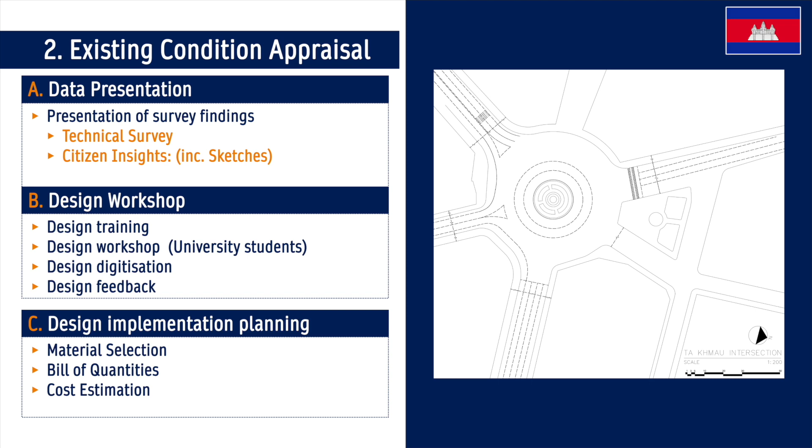We've created a car park even for vehicles. There's a bank there, and instead of them parking all over the place, we've organized that space against the demand data that we had. And we've also just rationalized how vehicles move through the space.

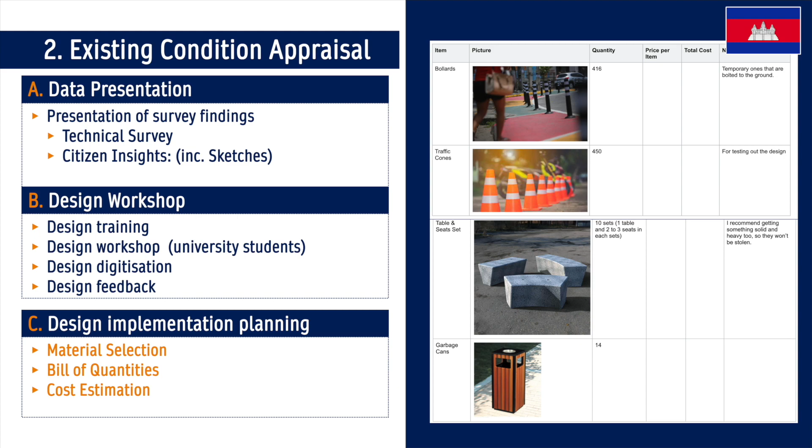Once we had our design, it was time to explore how we can implement it. We gave thought to the different materials we would like to use. We developed a bill of quantities, so listed all the items we need, how many we need, how much they cost, where we can source them from, and got a cost estimate. And the architects went pretty wild on their drawing. So the initial cost was very high. So we are going to scale back depending on the budget we can allocate towards this.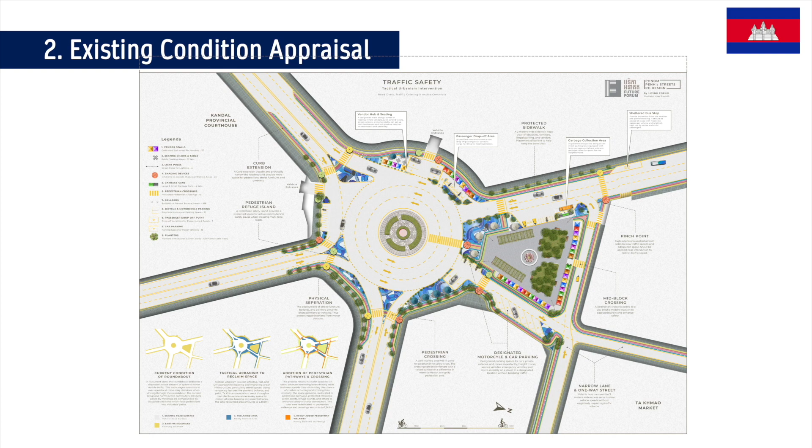And for this, we're still going around to a lot of the different development partners in Cambodia and seeing who can contribute what. And then we'll really decide what measures from the drawing we will introduce. That's where we are. We're mobilizing. And for that, we're also developing a lot of collateral, videos, doing social media work, and looking at how we can procure the material. Then we will go to implementation.

And throughout, again, we use participatory methods to make sure everyone is up to speed on what's going on, why it's happening. And we're always ready to answer any questions that may arise. Or if anyone is in opposition of the project, we're ready with answers, data-driven answers.

Then once we implement, we will evaluate the impact of the project. We have our baseline data. We will have the data post-implementation, and we can see what the impact is, understand the strengths and the weaknesses of the project, and position ourselves in a way where we can answer any questions anyone might have.

Once the project is implemented, you do, of course, have to maintain and monitor what you've introduced. You have to clean it, you have to fix some of the materials that may be broken or stolen, and you can also organize lots of activities, activate this space in a nice way.

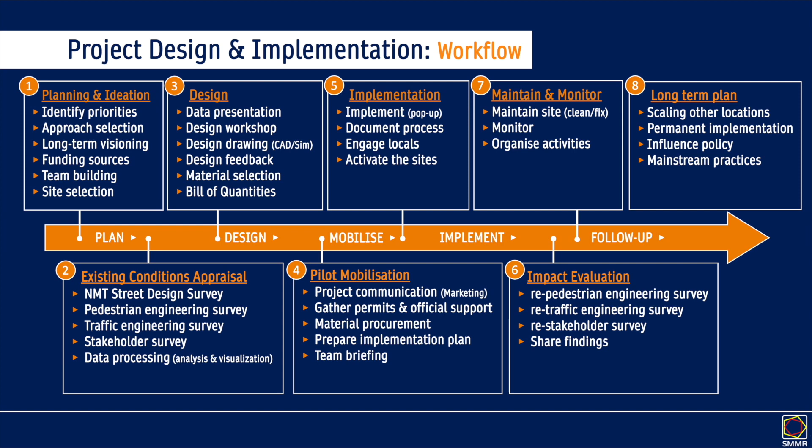And once you've done that, you can start thinking about your long-term plan. How can we scale this up? How can we make it more of a permanent implementation, and what civil works might be required for that? So that's the workflow, and we could and should create an adapted version of this for Irisan National High School. I have another section to my presentation.

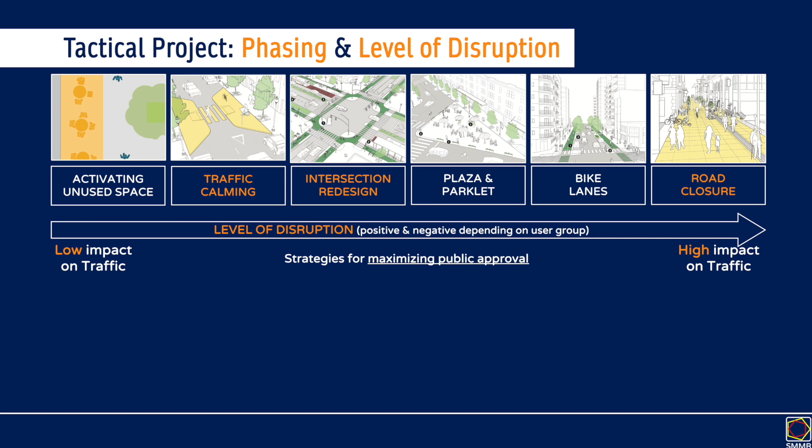I don't have the time to go through it, which was more on Session Road, which is a more controversial project that has a much higher impact on traffic, and just looked at how we could do an appraisal of that, an economic appraisal, and how we can do a traffic impact assessment and engage the community on that. But that's a massive topic.

But one suggestion that I've seen work well for projects is using tools like micro simulation tools. Does anyone know where this is? I shared this at BAQ as well. Any ideas? This is essentially a big roundabout, or used to be. Multi-lane roundabout, lots of lanes here, 4 lanes up at the top, 3 lanes here, a space where lots of vehicles come together. So this is the city center of London.

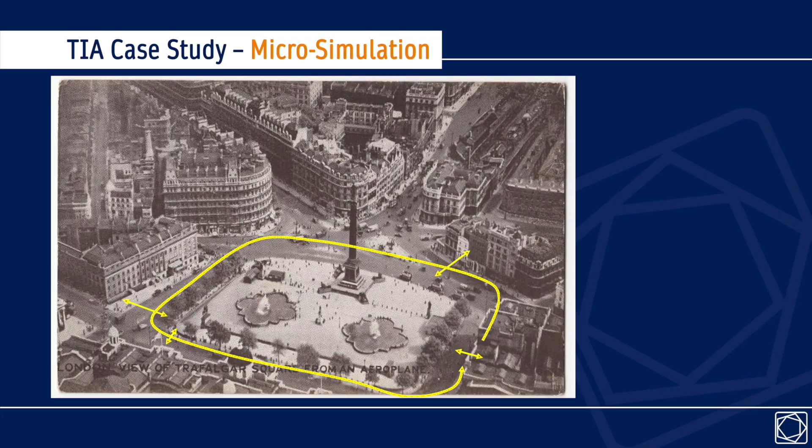It's Trafalgar Square, arguably the heart of London, where a lot of major arterial roads pour in around this big space. And this is 100 years ago. Today, the space looks more like this. So any observations here? Can you tell what has changed? Big hint. This street here has been pedestrianized, so it's no longer a big roundabout.

They did this using a UNESCO World Heritage grant, which set out to improve this public space. It was essentially an island of pollution, and they wanted to make it a more pleasant space for tourists. And this has happened in a context of extreme growth. London 100 years ago was significantly smaller, with significantly fewer vehicles than it is today. Yet in the early 2000s, they were able to close off a street.

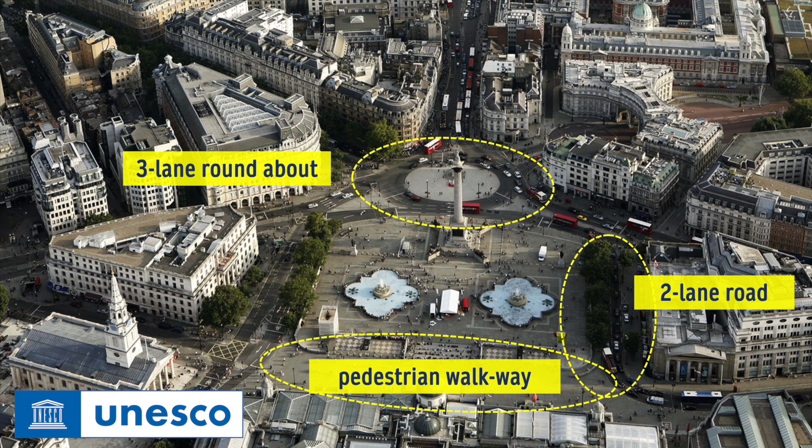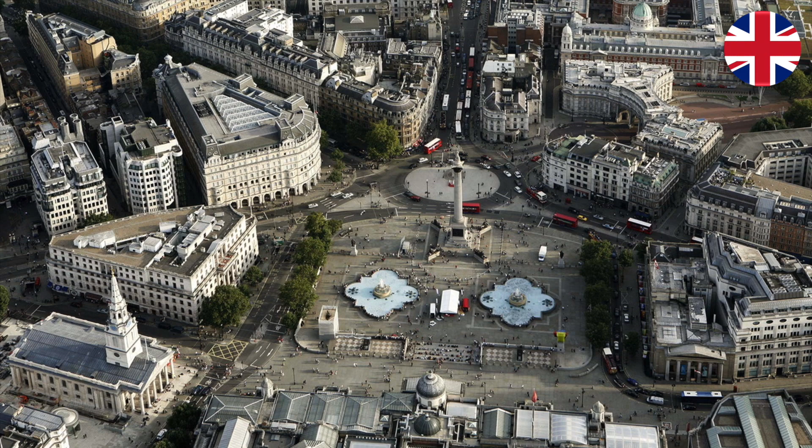And you can see what they've done. There's a small roundabout there in the background that didn't exist before. So how can you go from having a very big roundabout, multi-lane roundabout with a much higher level of service, to this in a context of growth? Well, there's a number of strategies that were employed. Obviously, they've over the years really invested in public transport to shift people away from private cars, but still the absolute number of private cars has significantly increased.

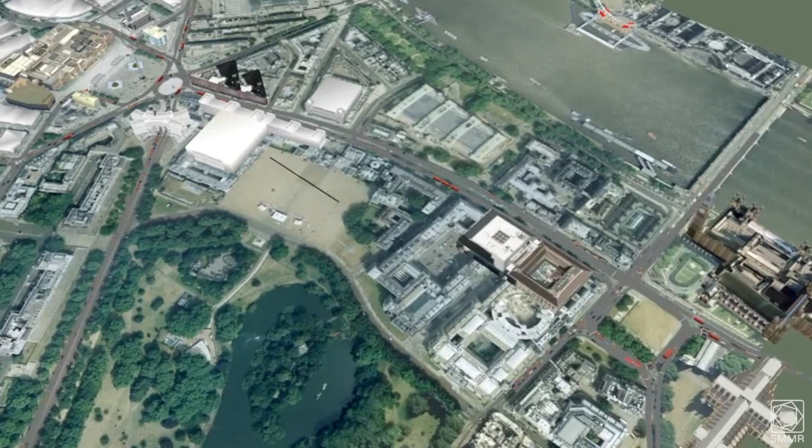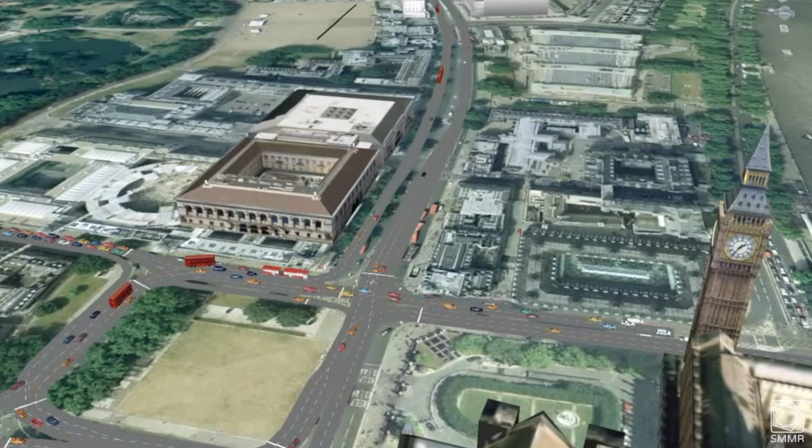And when they originally put forward this project, showed the designs, the city thought, there's no way this can work. The logic doesn't make sense, but they said, no, look, our idea is we'll develop a queue relocation strategy. And they proved it using Vissim, which is a tool you use in Baguio. And in this tool, you can explore ways you can program traffic lights to hold back traffic, essentially. But you can program your traffic lights, all different kinds of traffic light systems in this tool.

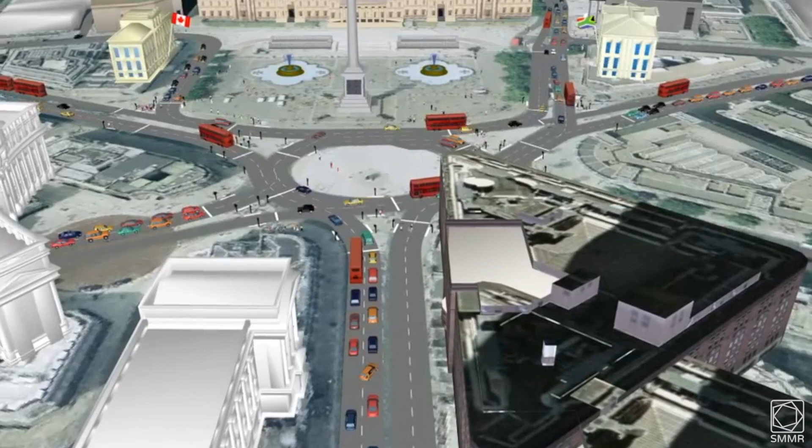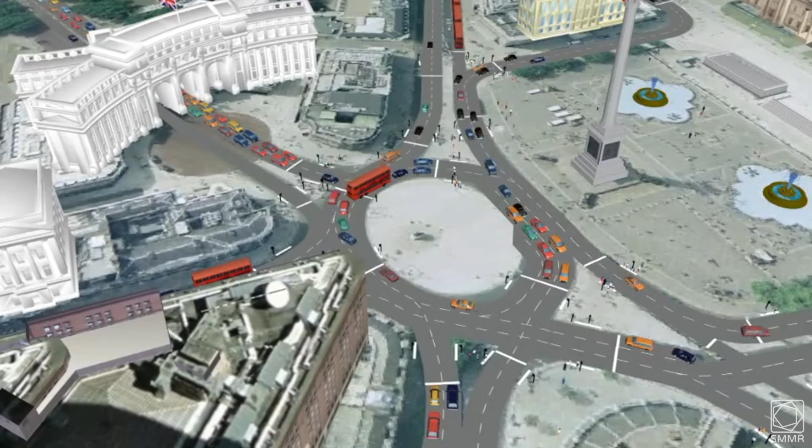But in this particular example, they essentially explored how you could use traffic lights and demand responsive traffic lights to improve the flow. And the idea was basically, if this roundabout here oversaturates, there will be gridlock throughout the city. So we have to prevent that from happening. So the traffic lights right around this actual roundabout, they can detect the level of traffic. And when they detect a 60% threshold, they will send a signal upstream to a different set of traffic lights, and they will tell them to hold back the traffic.

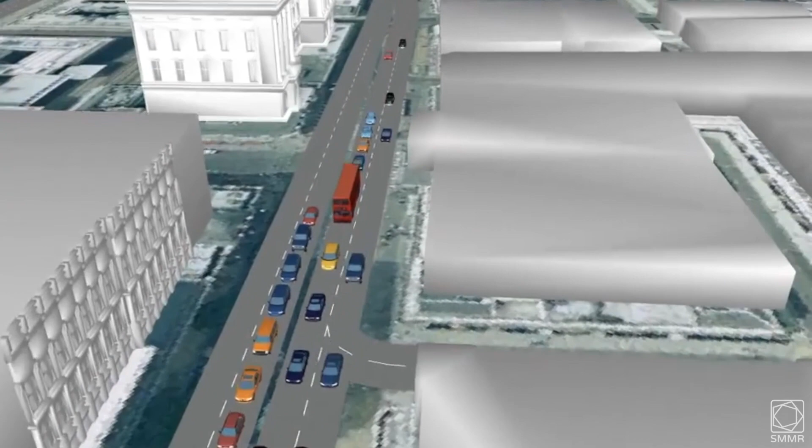So essentially, this space here can never oversaturate. There will always be good flow. The buildup will happen upstream, but that's much more manageable. And they've done this in the areas surrounding at a number of different traffic lights, and they've essentially actuated their traffic lights at a network level. And they were able to show that with this configuration, this space can continue operating.

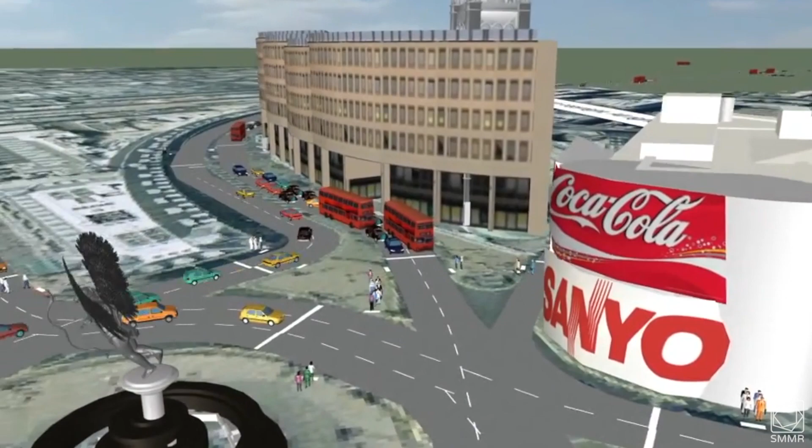And I feel that in the case of Session Road, maybe ideas like that could also be explored and communicated to the public. And you could produce a simulation and have nice visual outputs that are scientifically valid. And if that's something of interest, I'd be happy to give some thought as to what this could look like and what data might be needed. And these tools are very powerful.

You could do a lot of other interesting work, do some emissions modeling or simulation in the tool, and also understand the potential emission reductions or the increase that would happen on the surrounding areas, and have all of this up your sleeve. So when you communicate to the public, you have the data, you have nice video visuals, and I'll leave it there for now. That was a lot of information. So thank you, everyone. I am open for questions.